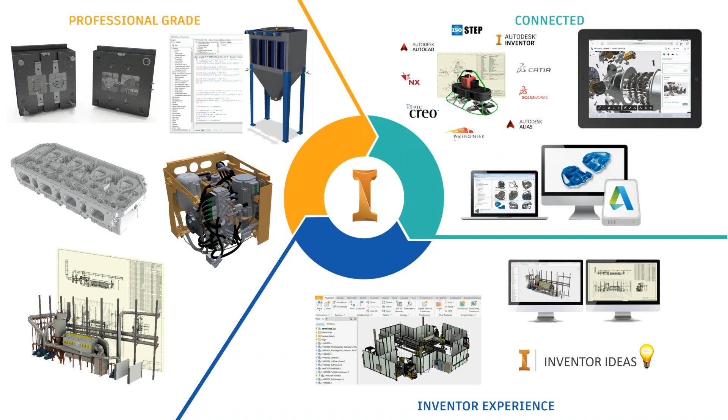And also we're creating a cohesive experience across our product portfolio, because one of the things that we realize is that many of you on the call use multiple Autodesk products. It's not just Inventor. And we don't want you to feel like you're constantly switching gears when you switch between applications that you use on a regular basis.

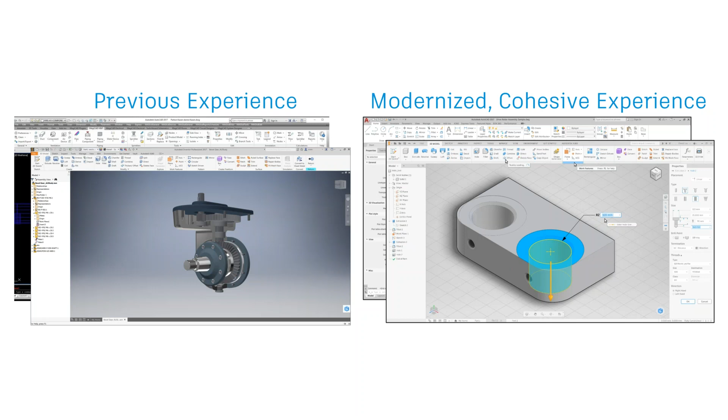And another thing that you're going to notice is the new light theme interface. We've adjusted lighting styles. We've brightened them up. There's new icons and colors and feature manipulators. And we've also been working on the property panel, which I'll talk more about in the next slide.

So this is something that you could manually do in the past, but what we're trying to do is make it easier for you, so you don't need to think about or research the settings that you have to change for high performance or high quality graphics.

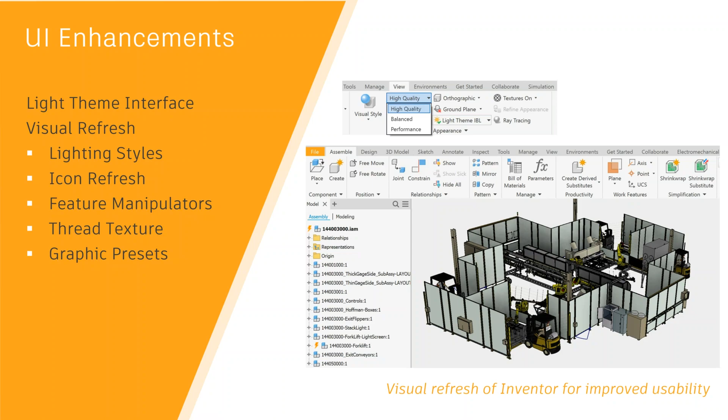So let's take a closer look at the user interface. Like I said earlier, we want cohesion across the other Autodesk products. The property panel, if you recall, we started the property panel a couple of years ago with the measure command. And then last year, we updated the whole dialog to the property panel. And it has been successful, so we added several new commands this year.

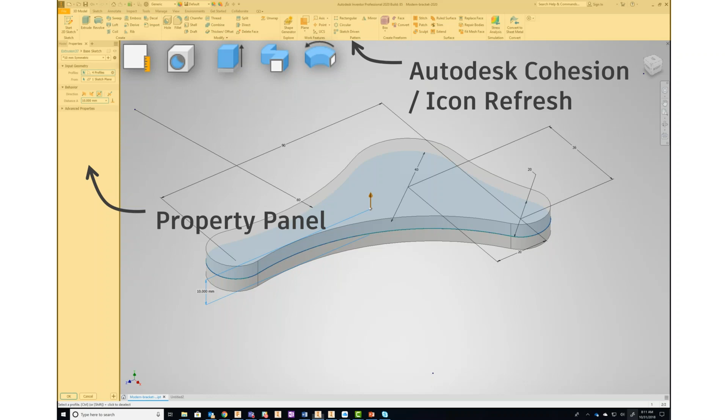And I'm going to talk more about the panel, but before I do, it's important to understand that the panel is not just a new look. The purpose of the panel is to make you more productive. And of course, you're probably wondering, well, how is that? Well, first, you may have noticed the breadcrumbs at the top of the panel.

What that does is it enables you to quickly switch between editing your sketch, your 2D profile, and the feature options. For example, if you create a sketch and then you go to the extrude command, you're able to edit the sketch without leaving the extrude. You can simply make your change to the 2D and flip right back to the extrude options in the panel.

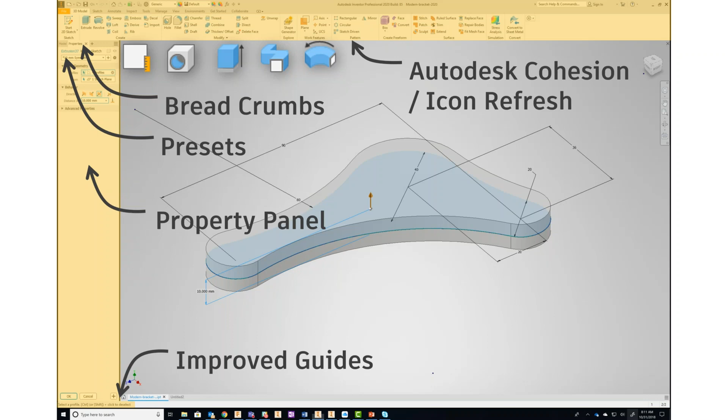And so the next thing is presets. We added these for the hole command. Now you'll find them in the extrude as well. And these presets can be set for individuals or across your design team. And then we also improved the guides. They've been there in the past, but some of them were a bit unclear, so we updated those.

And then edit in place, kind of like the breadcrumb, you have the ability to make changes to the dimensions for the sketch or the feature. You don't have to get out of the feature command to make changes to the dimensions on the sketch. And then another highly requested feature, better multi-monitor support. We know that many of you are using more than one monitor, so we made this experience better.

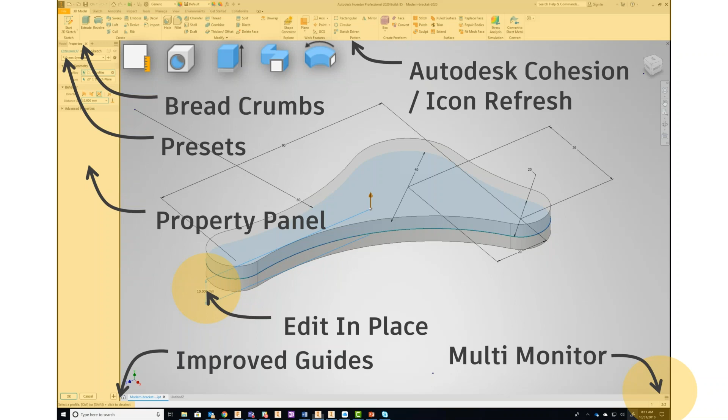So once again, on the property panel, these are the features that we have moved to the property panel for Inventor 2020. That's the extrude, revolve, sweep, frame generator, and thread. And we're trying to tackle the commands that are used the most. And then for those of you who enjoy beta testing new releases, let us know your thoughts. As you use these new panels, we spend a lot of time listening to those who are using the software as you test, for example, the new hole panel from last year.

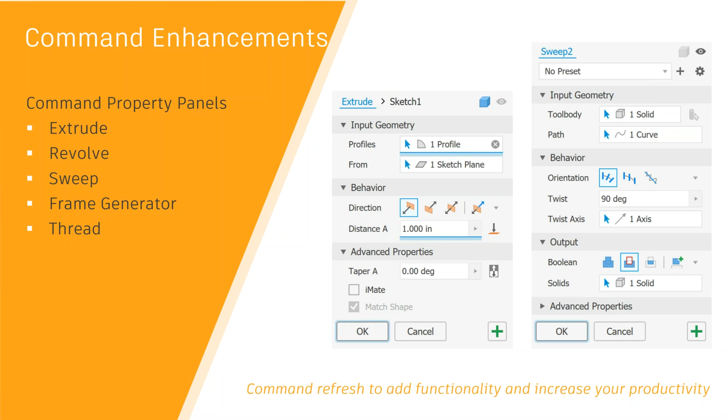So multi-monitor support. The Inventor team recognizes that many of you, I believe more than 60% of you, are working from 2 monitors. And so there's times where you prefer to use both of them for your design work. And now you have the ability to drag your models outside the Inventor application interface to other monitors. We've had great feedback on this. It was a huge request, and our customers are pleased to see their support on this one.

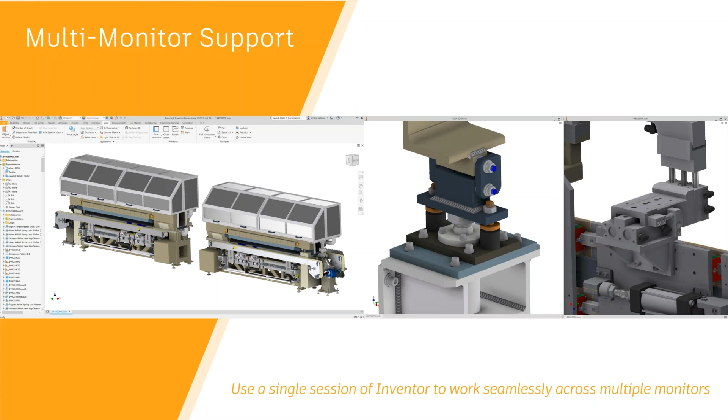So we're going to take a look at most of the enhancements in action during this presentation. And once again, you're going to notice the fresh new look for the user interface, for the ribbon feature icons, and also the features in the browser. And we're using the new lighting style here called Light Theme, which complements the new icons in 2020. And there's also the new graphic presets for quickly switching from performance-based and high-quality graphic settings. And then here, watch how easy it is to move the designs outside the Inventor application to other monitors.

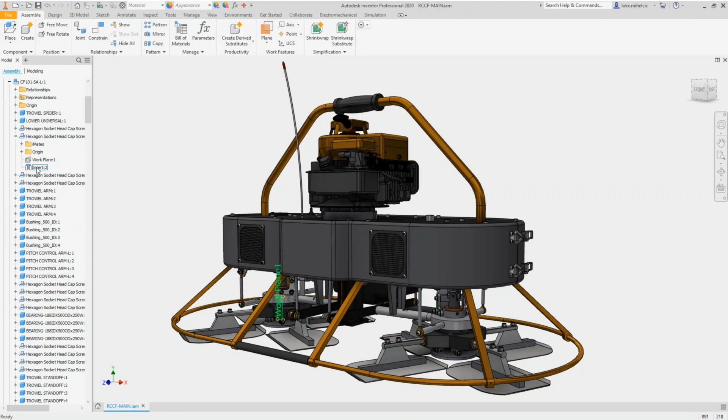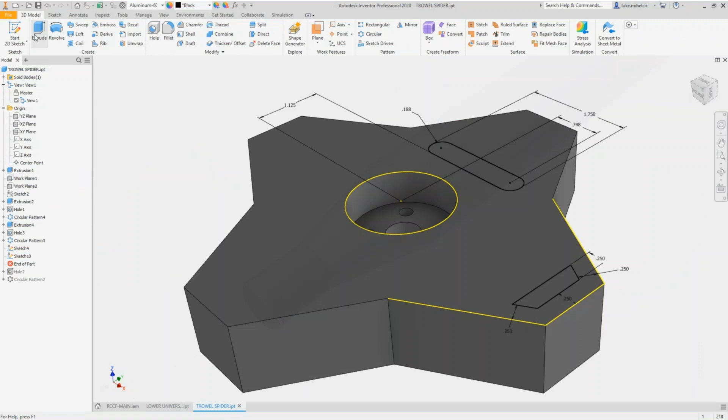And here's a look at the new property panel in action, where you can edit the dimensions in place. All the commands that you need are available in the panel for changing the geometry type, or your end conditions, the direction or taper angles. And once again, we hope that you're going to enjoy the flexibility to quickly switch between editing your sketch and the feature options using the breadcrumbs in the panel.

Okay, so now Luke is going to take you through some of the new design enhancements for Inventor 2020. All righty, thank you, Jim.

One of the first things I want to talk about is the solid sweep. This is a command you can use to either add material or subtract material. This was something you could kind of do in previous releases, but it didn't have the robustness that the current release does, so there's lots of things you'll see in the video we're going to play in a second. The idea is it's another way to create complex geometry that can actually simulate a tool path for a machine tool, if you want to simulate what removing that material would look like.

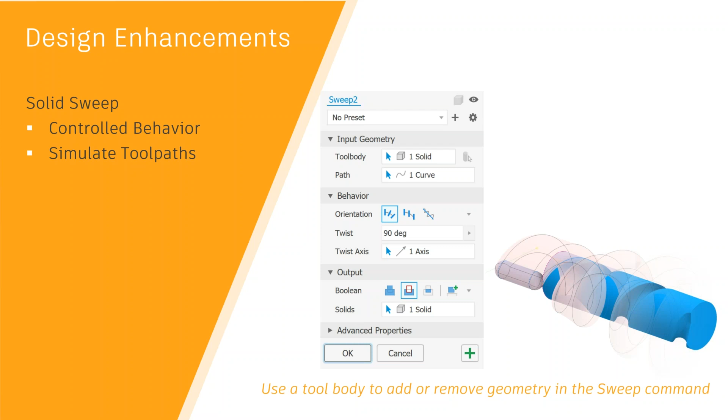The next one is the unwrap. This one was a pretty big one. We've been doing sheet metal for years and we're really good at it, but one thing people have asked for is what about stamped components? If you imagine something that doesn't follow a typical sheet metal bend calculation, where you're actually deforming the material, we can now do that with our unwrap command. It gives you an idea of high and low stresses occurring on that material as it's being deformed through that punching or stamping process. The cool thing is you can export this as a flat pattern with the material needed to create that stamp.

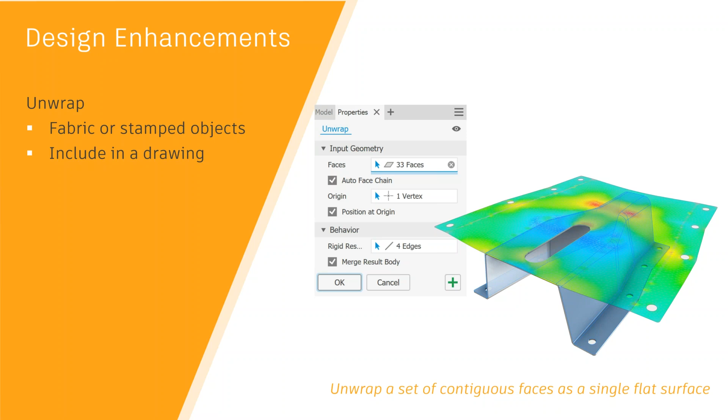Moving on to the next one, finding loops and regions. Previously, anytime you had intersecting loops and regions, it was really difficult to choose what you wanted. With some pretty easy enhancements in the background, they were able to make it way more robust. There are also some taper options, what happens to that geometry when you taper it, so now you can merge those faces when extruding with different taper options on.

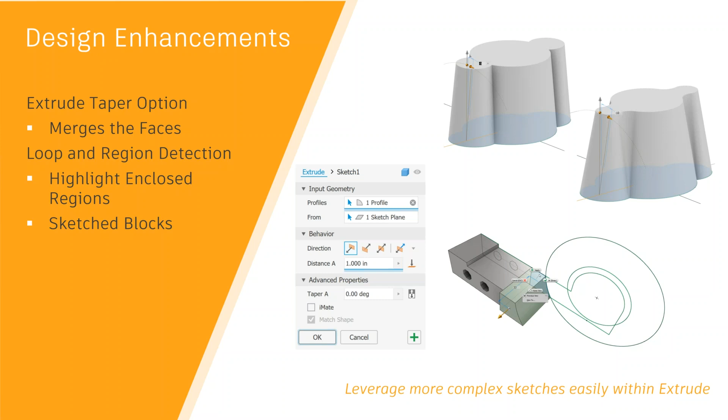The next one I want to talk about is some design enhancements as it relates to sketch blocks. Sketch blocks now allow you to actually see relationships from one to another, where previously this wasn't available. You could see information as a sketch related to a feature, but not necessarily a sketch block. That's going to be available in your relationships tool.

Content Center has some really great improvements that allow you to do keyword searching, and there's a new quick wildcard character. Let's say you forget the name of something but you know a portion of it - you can key in a portion of it, throw in a wildcard, and get that broader search to find those components when you don't necessarily know the full name of that particular part inside the Content Center.

And like always, we want our customers to move from one release to the next. We're putting in all this great technology, and there's been some really good migration enhancements. They're going to carry over property panel and command presets automatically when you migrate from a previous version of Inventor to the most current. Now we're going to take a peek at what this looks like in action.

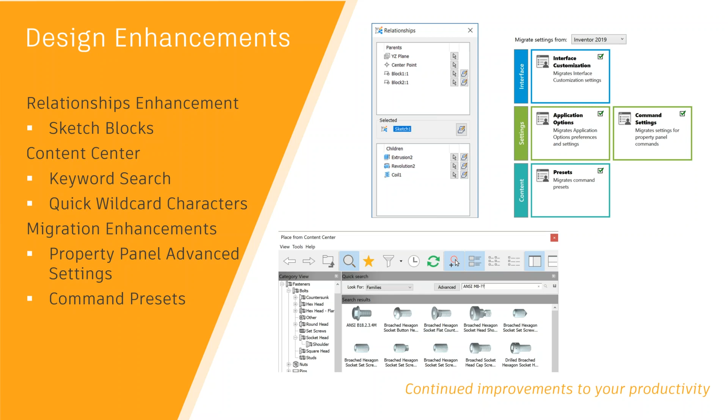There may be a bit of a delay between what I'm saying and what you're seeing, so I apologize for that. But if you take a look at the video, one of the very first things we want to talk about is seeing that region and loop detection in action.

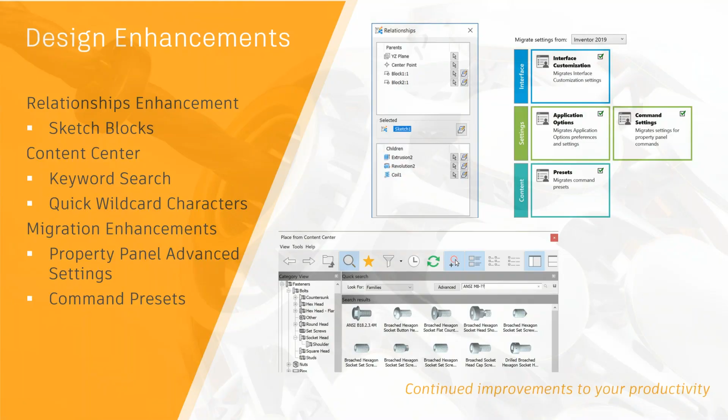Actually, we have a really cool animation of that pill moving using the solid sweep. But the first one we want to talk about in detail is the loop. You can see you have multiple loops, and in some cases these loops are overlapping, and you can really easily select one or another, so creating geometry is going to go super fast. You can see the information for the relationships as well.

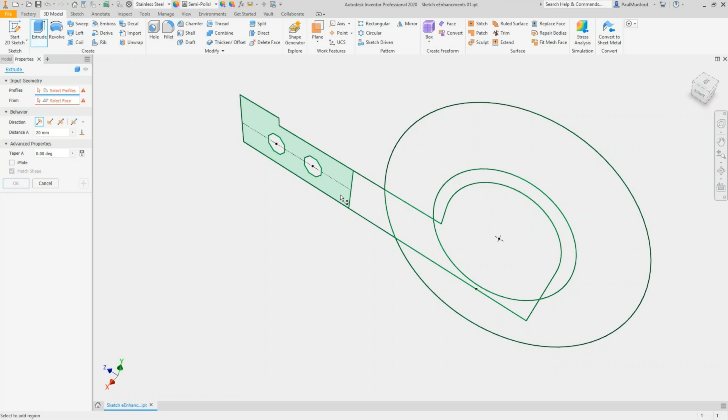And then here's that solid sweep happening in action, and it's super simple. You basically have a tool body and a path, and then what you're taking material away from. You can see that you can really easily create complex geometry. You have all types of options to show off inside that particular command, with that sweep, to create again that more robust type of geometry.

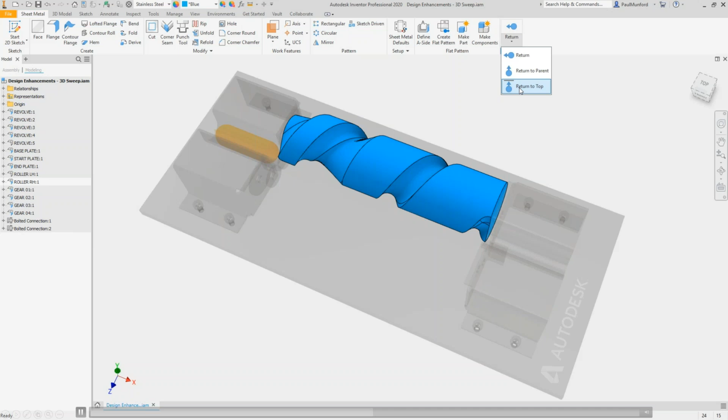I think that's the end of that video, Jim. Otherwise it may have froze up on my screen. Oh, I'm sorry about that. Hang on just a second, Luke. Okay, I'm seeing the sheet metal now. I think we're just having a little bit of a speed issue with it. Let me change something real quick. I'll just leave it. Okay, no problem. Sorry about that. Don't worry about it.

So let's move on to that next section. We kind of covered it anyways. So the next section I want to talk about is Frame Generator.

Frame Generator is a great tool inside Inventor 2020. If you're not using it, you should really check it out. It's a really quick, easy way to create frame style components from standard cross sections, and we have tons and tons of standards that we follow.

And what we've done in 2020 is added some new end cap customization. This was something you would have to do manually previously. We've also improved the notch command so that you can easily work with the property panel and create custom style notches.

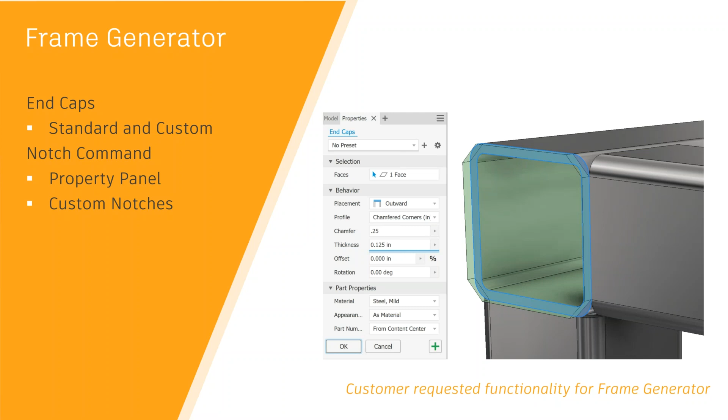Continuing on with a little more frame generator stuff, we've also done a lot with the Miter property panel, and basically this is a usability enhancement here. Previously you could miter individual portions of a frame. What the MultiMiter now allows you to do is you can do these in succession or all at one time. So way more robust.

It's going to speed up doing different trims and different extends, and you also can now easily remove the end treatment. So let's say you miter something and then you want to bring that back to its original state. There's an easy way to remove some of those end treatments.

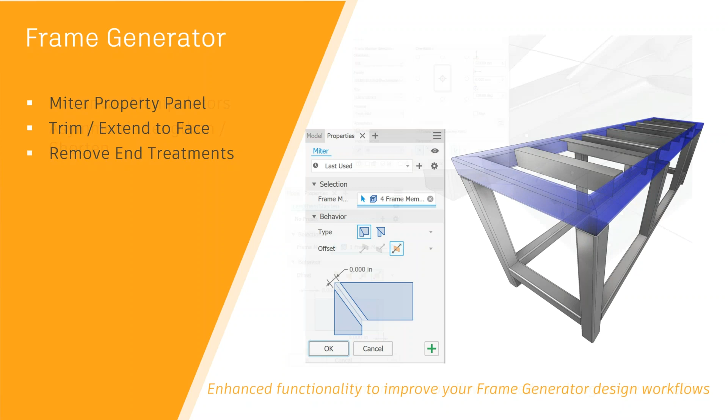And then wrapping up the frame generator section is we have this brand new in-canvas manipulator, and it doesn't really show all that well in this picture, but when you're working with a frame member, you can imagine getting it in the right orientation exactly how you want it can be challenging. Previously there was a dialog box and you had to pick which corner you wanted.

Now that in-canvas manipulator is right on the edge that you're working with. It makes it super easy for getting the exact orientation that you want for your particular frame member. And we also now have some asymmetrical lengthen and shorten, so you can add different lengths to either end of that particular frame member. It doesn't have to be the exact same.

And let's check out the video. Hopefully it'll play a little bit better this time.

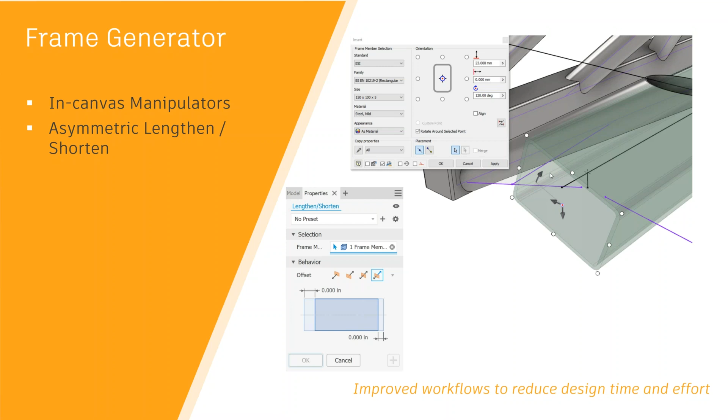One of the first things we want to do is take a look at some of that frame manipulator happening in place. The MultiMiter is the next thing that we're going to take a look at, where it can actually miter different components. And once that MultiMiter happens, you're going to see that asymmetrical lengthening and shortening.

And then the last thing is, again, that manipulator in action, placing that control on the edge that you're actually working with. There's also some file naming defaults that are in here that are going to make it super easy to have custom file names when you're creating your frame members, which is a huge benefit. That way you can control the names of your files and don't have to have these random file names generated down the road.

And I think that's about it, Jim.

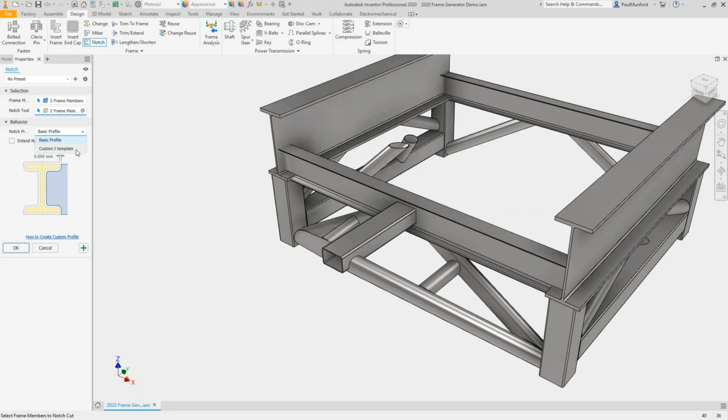Alrighty, customer-driven improvements. This is a big one. This is probably the thing that I'm most passionate about and most excited about. These are things that you, our customers and individuals involved in our beta program and involved in the Inventor ideas, this is information we get from you. This is feedback that you say, you know, we want this to work this way. Could you change this particular feature or add this kind of functionality? And this is, again, probably the most exciting stuff that I think is happening, because we're answering the questions that you're having.

So the first one is sheet metal mirroring. So right now, when you mirror sheet metals, or previously rather, in 2019 and previous, they wouldn't be associated. So if you updated one, the mirror wouldn't update.

Now the style from one to the other, so the new mirrored component is going to follow what that parent is set to. So you don't have to worry about updating them individually.

Also, joints now have a center slot option. This doesn't seem like a big deal, but if you've done a lot of assemblies, putting nuts, bolts, and washers together, the minute you have a slot and want to find the center of it, you used to have to find a way to do this. It typically took multiple steps, where now we can do this with a single joint command.

Similar to the naming you saw with the frame generator, we now can set default file name options for pipe and tube. Also, the new design accelerator with shaft generator has been improved as well. So let's take a quick look at that video.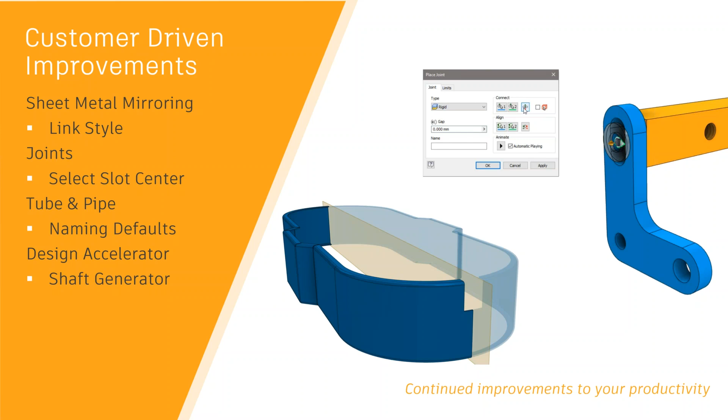So again, this all came from Inventor Ideas. There was a mirroring sheet metal part idea that one of our customers felt would be important, so we implemented it. Now when you mirror a component at the assembly level that is sheet metal, when you update that original style, that new piece of sheet metal updates. You don't have to go in and make a secondary edit.

Here is that joints feature working in action. You can see you can quickly, with a single joint, snap right to the centers of slots. So it's going to speed up that assembly process.

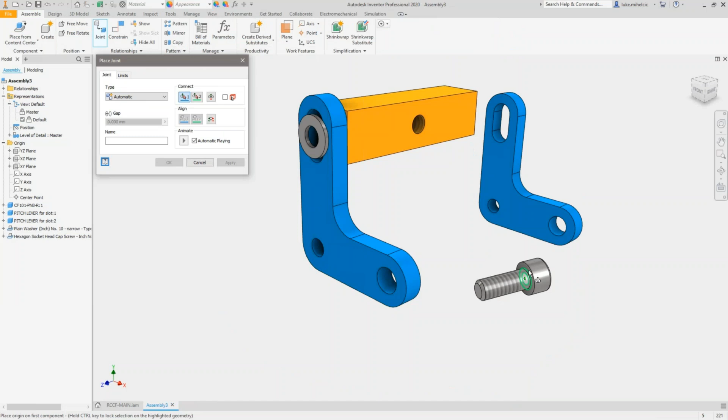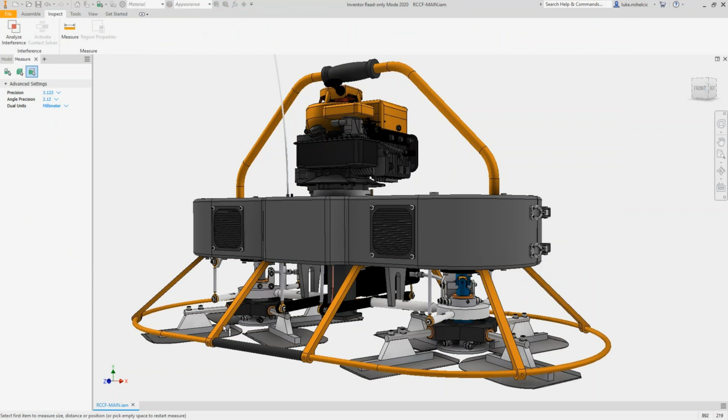The next thing we're going to talk about is taking that bill of material information and saving that. Oh, I'm sorry, this is the read-only mode - I forgot to mention that since we didn't have it on the slide. The read-only mode is another great option. In 2020, let's say you have someone in purchasing that needs bill of material information. You can easily send that information to them, or they can gain it themselves using read-only mode, and it's not going to take up a license inside of Autodesk Inventor. It is limited - they can't do anything but export bill of materials and do some measuring and slicing, but it's a really great option for sales engineers or folks in purchasing.

And give it back to Jim, and he's going to talk about some performance.

Make sure I'm off mute here. Luke, can you hear me?

You're good. Okay. So for performance improvements, this is something we've been spending a lot of time on in every release, especially over the past few years, and this release is no exception. We've made improvements to things like entering in-place editing, window selection when using selection filters for component, part, or body, and also zoom, pan, and rotate performance, especially when multiple components are selected. Component patterns have also been improved for preview display, computation, and patterning virtual components. Also, more commands are available when working in Express mode, and 3D section view performance has also been improved. It's also worth noting there are performance improvements for tube and pipe as well.

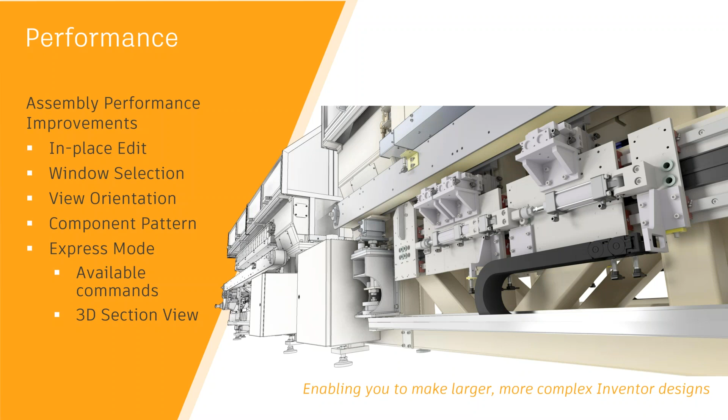For the part environment, you'll see better performance for nested feature patterns and identical feature patterns. Also, part files that contain imported DXF or DWG files are going to open faster. In drawings, you'll see improvements with view previews, changing the display of a part in an assembly using the browser, and faster auxiliary view creation, especially in large assemblies, and also faster section views. With AnyCAD, there's better performance when referencing an open CAD file, or when opening a CAD file from another system.

Hang on just a second.

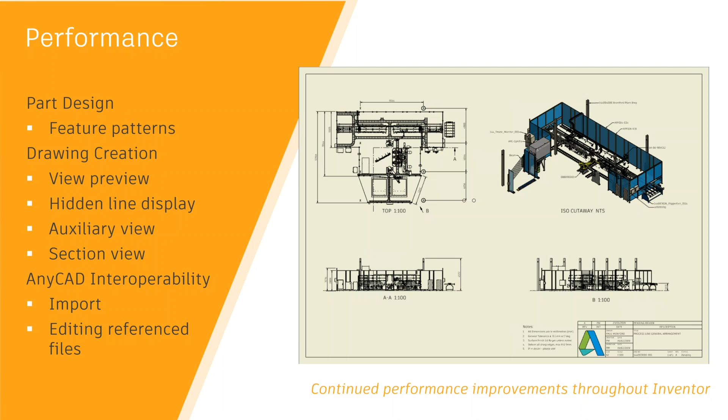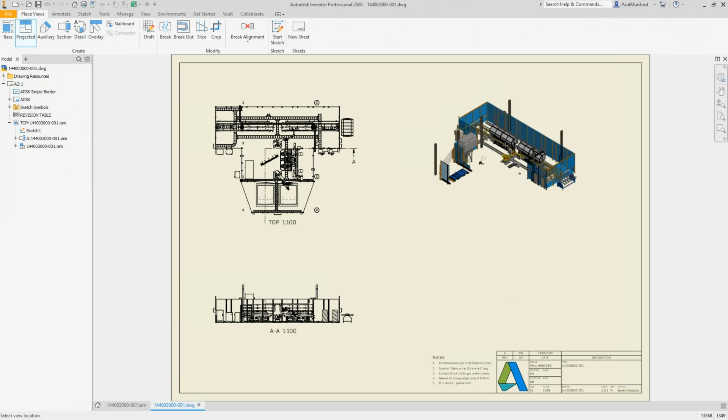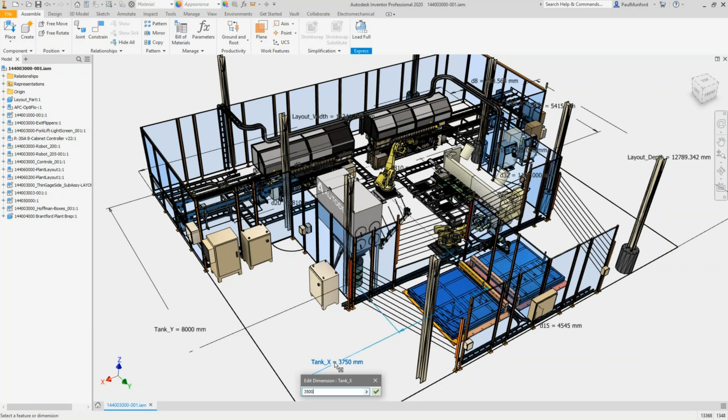So here's a look at what we've done with performance. No matter what size assemblies you work with, it's exciting to see performance improvements in all areas for parts, assemblies, and drawings. It's not just about working with large assembly models - high performance is essential in drawings as well. Working with AnyCAD references, in this case STEP, you'll see improvements when referencing files from other CAD systems. And for those of you who enjoy working in Express mode, you can now leverage more workflows like skeletal modeling techniques. The use of the browser is now much more responsive, and zoom and pan has also been improved when you have a lot of components selected.

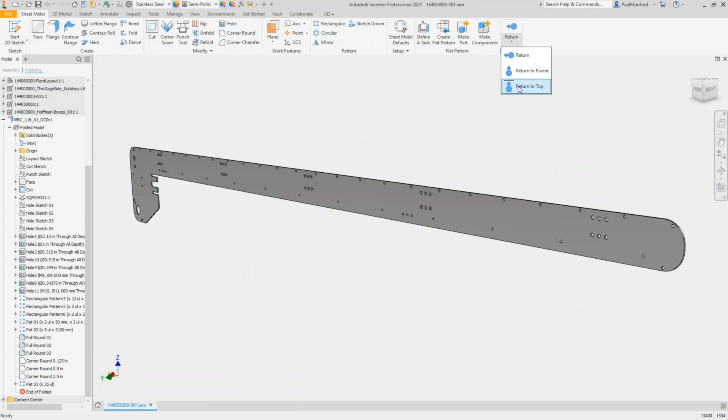We'll jump into the part environment here. In the part environment, you'll see performance improvements for feature patterns. This also means that associative patterns in your assemblies are going to generate quicker too. And then here in the drawing environment, we can create auxiliary and section views faster.

Now for interoperability, one of the things that many of you on the call are familiar with is AnyCAD. It's the ability to open a file from another major CAD system in their native file format without the need to translate the geometry, and it remains associative. So if the model changes, it's going to update in Inventor as well. As expected, this technology requires a lot of dedication to stay up to date with the versions of those other CAD systems. And we've done that for CATIA, JT, Parasolid, Rhino, and SolidWorks.

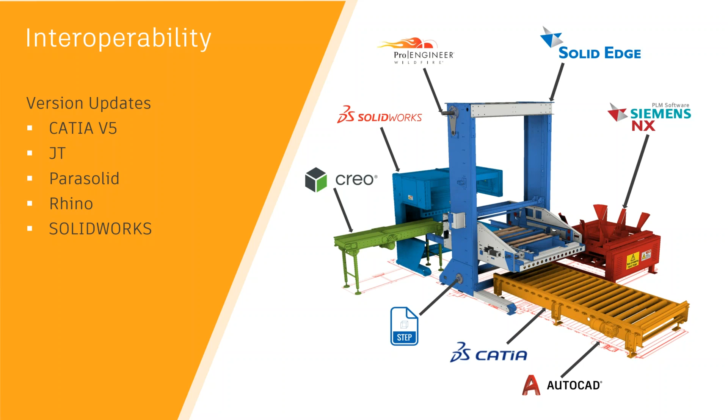So sticking with the interoperability theme, some of you are working back and forth between Inventor and Fusion 360 to do things like generative design, which is great. We want to make sure that there's a good workflow between them so you don't have to translate the data. This is something that we made available last year, and we're fully releasing the technology in Inventor 2020.

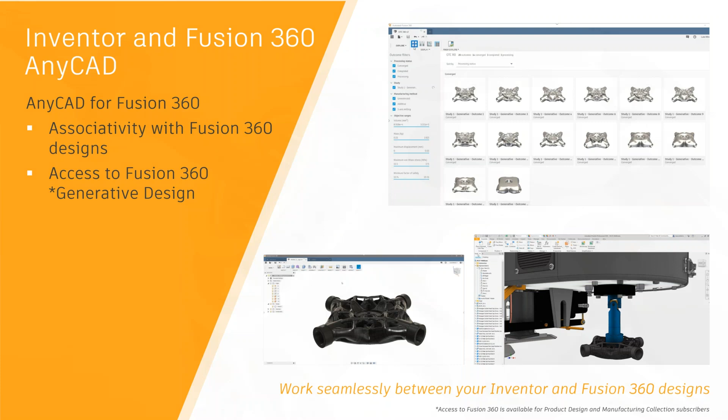So once again, there's a couple of things improved with AnyCAD. First, you're going to notice better performance when referencing files from those other CAD systems. And we're continuing to update Inventor to work with those latest versions that I had mentioned. AnyCAD is really just one of the greatest enhancements for Inventor, and we're going to continue to focus on it for future releases.

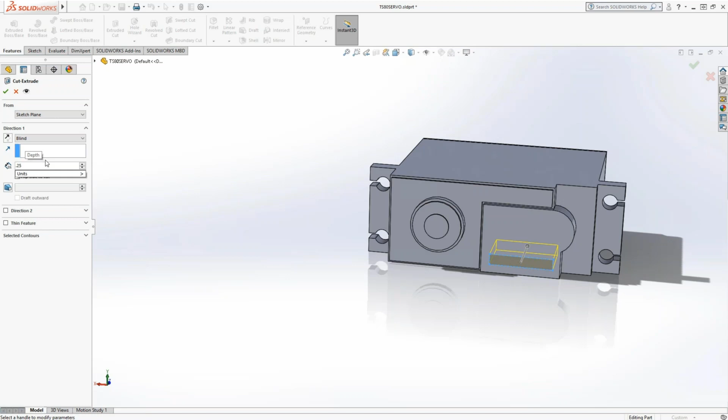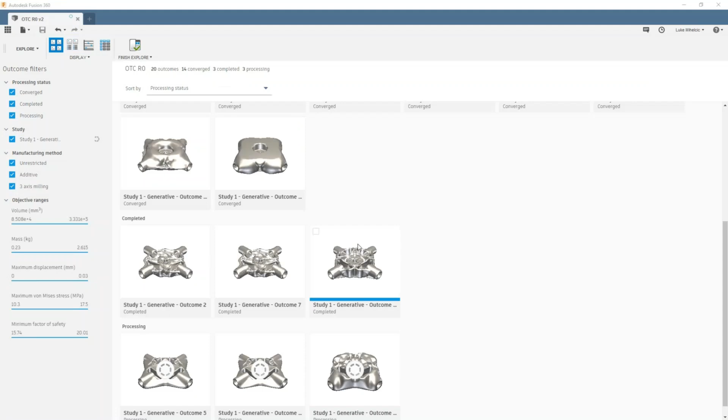And additionally, the latest update makes it easier than ever to connect with Fusion 360 for generative design workflows to Inventor. Now you can simply reference the Fusion 360 file, eliminating the need to export and import the data. You can now access generative design as part of your subscription to the Product Design and Manufacturing collection. So for those of you who are new to generative design, you can set up studies to find the best possible solution based on your own design requirements.

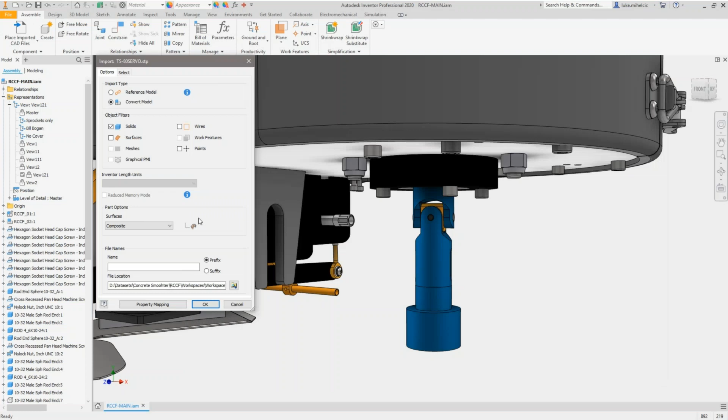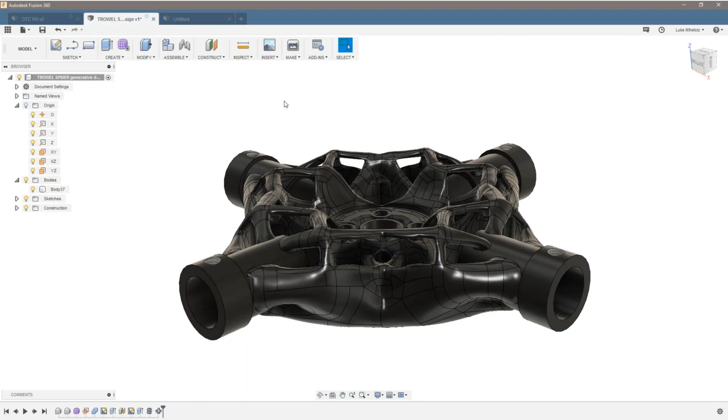And any other changes that you make in Fusion 360 are going to reflect inside Inventor. This AnyCAD technology, like I said, it's a game changer for a lot of you on this call who are working with customers or suppliers that are using various CAD software, because it enables you to work with anyone, regardless of the CAD software that they use. So now Luke is going to talk about the latest point release of Inventor, which is hot off the press this week.

I think you're muted, Luke. I'm sorry, am I muted? Sorry, I was muted that whole time. It was a really good answer. I was going to say, I'm just going to answer a question, Jim, while we're going.

So Pedro asked the question, how many parts can you put into your assembly? That's really going to depend on your system requirements and the PC that you happen to be running off of. We have a customer right now who has over 1 million parts in an assembly. They are running really big, really expensive computers, I imagine. So that is like on the absolute kind of high end.

Based on your system and your PC requirements, you should have no problem running multi-hundred, multi-thousand part assemblies when you're working inside of Inventor. So hope that answers your question. It kind of is really dependent on the system that you're running it off of. Obviously, a laptop is not going to do as well as a super powerful desktop that's kind of dedicated for CAD.

So, but as Jim mentioned, hot off the presses, so the 16th, so yesterday, Inventor 2020.1. We do a handful of dot releases each year. This is the first one. And this one is chock full of really great stuff as well.

You're also going to be able to change the annotation plane of your components. You're going to be able to go in when you've done 3D annotation. I typically had to delete it to redo that. Now you can actually change it after the fact. And one thing that's really powerful, and you see in that image on the bottom right, is all that kind of extra information there. So it says fillet bend radius 0.625, another bend radius 0.625.

That's what we call extended part information. And it wasn't available everywhere, but now it's available in sheet metal, shells, splits, combines, patterns, surface features. So without having to dig into a component, you can get an idea of what that part was made up of and what some of the dimensions are. So it can eliminate some measuring and some guesswork and having to dig into different parts and assemblies.

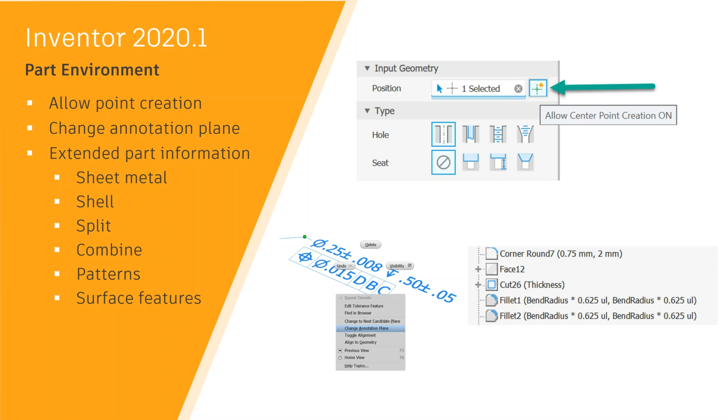Next slide, we're going to talk about the assembly environment, because we tend to make updates in multiple locations. So the design accelerator has been restructured for a handful of tools, and what this means is when you used design accelerators previously, it made a subassembly of those components that are included in that design accelerator. Now you can choose to have that subassembly on, or you can choose to have that subassembly off. It's totally up to you. So it gives you a lot more control. A lot of this stuff here is about controlling your assemblies a little better.

Frame Generator has better controls on it. So the actual manipulator that we just talked about in 2020, it would show up at the end of a frame member. Now that controller shows up where you pick on that particular edge, and again, it's just a little more user-friendly.

Probably my favorite thing that happened in 2020 and 2020.1 is the ability to create virtual components. If you've ever had to create virtual components inside of Inventor, it was a pretty tedious process if you had more than one. Now you can very easily, via your bill of material or BOM manager, create multiple virtual components. And these are things that maybe you don't do a 3D model of, but you want to be included in your bill of material. So maybe things like paint, a maintenance kit, or a specialized wrench that goes along with that particular assembly for assembly and disassembly. Now you can do all of that quickly and easily inside of the BOM manager.

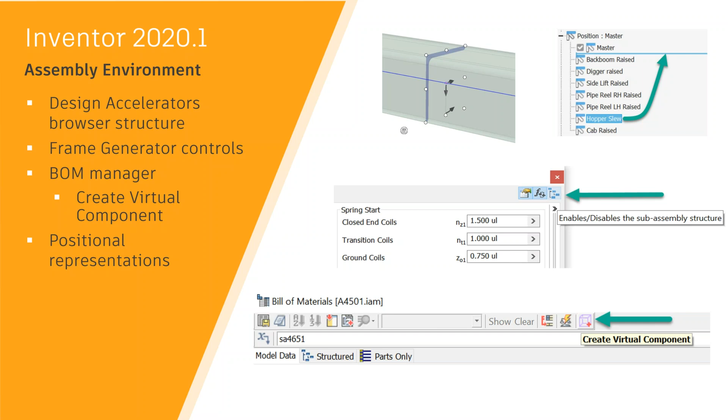And positional representations can now be just dragged to different locations. You don't have to worry about deleting them and recreating them, so you can reorganize those all you want.

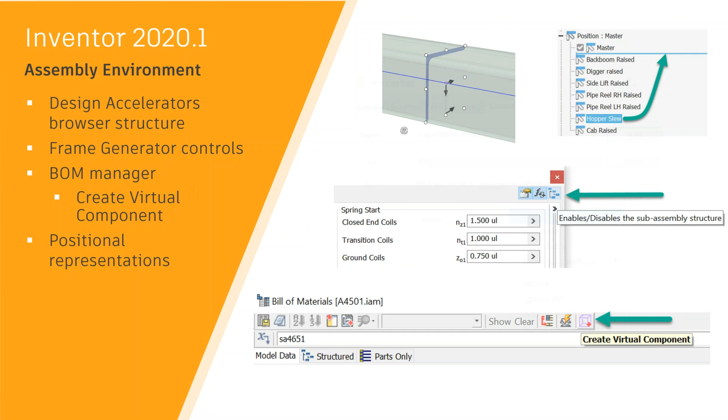And then finally, inside of the drawing environment, the iProperty dialog box has a ton of stuff added to it. So right off the bat, I'm a terrible speller. One of my favorite things is the fact that spell check is now included with all of your custom iProperty pieces of information that you're adding. Column width is now going to adjust automatically, so they won't be truncated whenever you go back and look at them. And previously, you had to delete these things one at a time. They've added the ability to delete multiple ones, or all of them, all at one time.

So now we're going to check out the video, and hopefully this one plays. I think some of the other ones are playing slowly, and my voiceover wasn't right on top of it. But this is a new video, so I have a pretty good handle of what it should be.

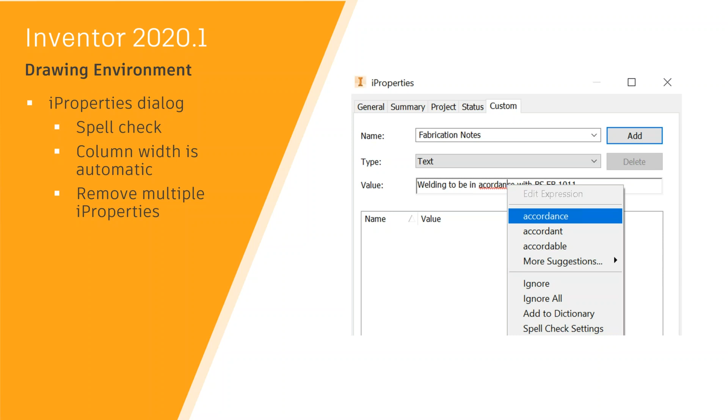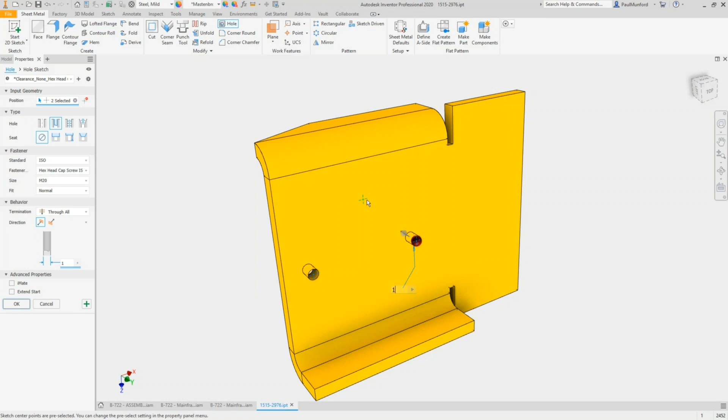So the first thing that you're going to see inside of Inventor is this hole command working with this option, how it's going to choose and set up those center points. So it's super easy to turn this on and off. It's a toggle, and that basically is going to control how you're creating those holes. And it's going to speed up that process and make this a little more user-friendly.

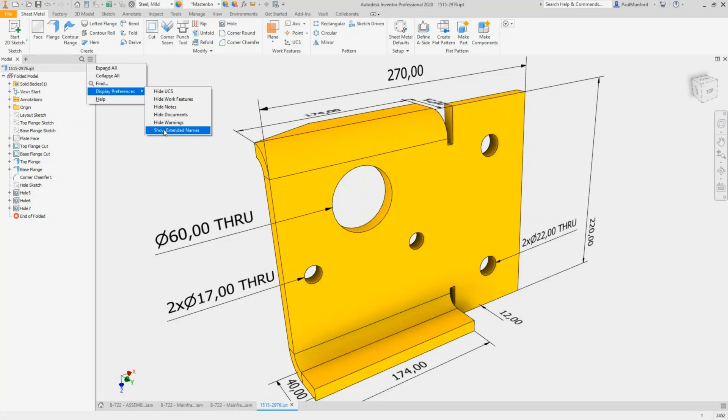Next up is the design accelerators. This is a really important one because typically you are always going to have things happening with your assembly when using design accelerator components where maybe it didn't behave the way you thought it would. The parts would turn into a subassembly, and there'd be a separate folder created where you're storing your files. And now you can actually go into those design accelerators and turn this on or off. So rather than having a big, huge assembly inside of your Inventor environment, you can now disable that, and it'll place everything at that level. So again, it gives you options for how you're going to control your assembly structure.

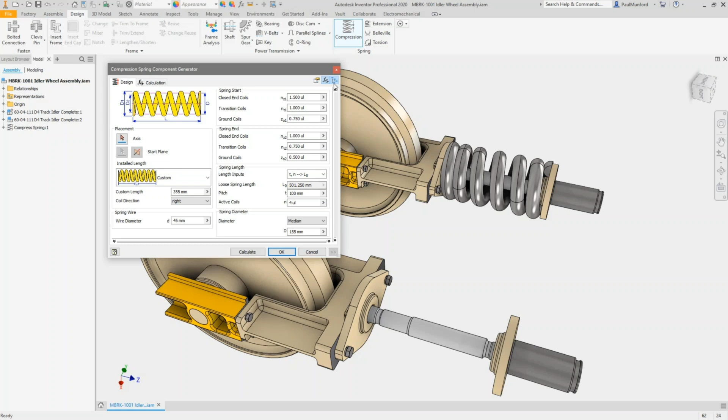And you're really going to notice this. We're going to create these two different ways, one with it enabled, one with it disabled. And you really see the difference in your browser. In one of these, it's a super simple insert into this assembly. And in the other one, it shows up as a really big subassembly with all these different things that make it up. So lots of options there.

Also, the manipulator being where you select it on the screen, again, a big usability piece, makes it really easy when you're working with that frame generator tool. And then the next one is going to be the virtual components.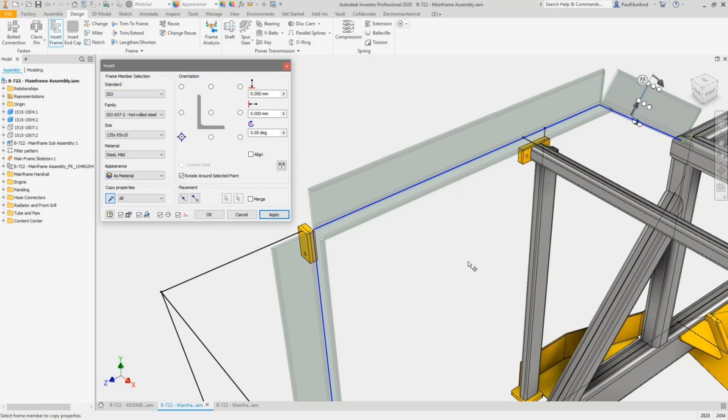So this is really powerful. Again, probably my favorite thing. So literally, you don't have to go in and create new part virtual and do that over and over again. So right at your bill of material level, you can create as many as you like, one after the other, and fill in some of the iProperty information. So it's really going to speed up that process.

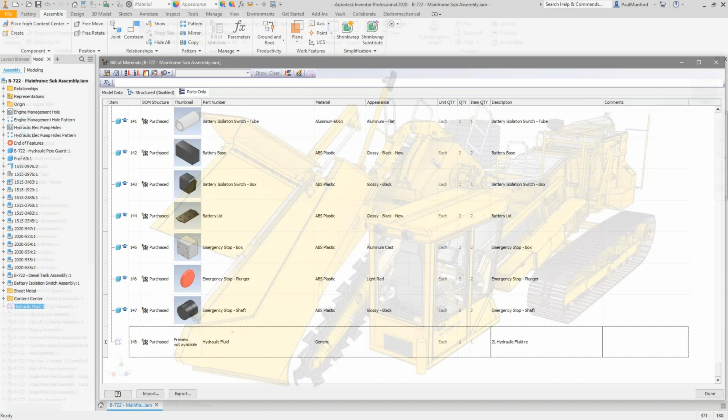Here, you're going to see how easy it is to drag and drop your positional representations to a new location. And then finally, we're going to check out all of those different iProperty updates. So you're going to see when the spell check is happening, it's going to give you the little red squiggly line letting you know that it was misspelled. You're going to be able to go in here and add those components and see that spell checking happening dynamically as you're working on them.

And also, again, that ability to delete multiple custom iProperties at one time rather than one after another. So it should, again, speed up a lot of things. And again, here's a look at the Inventor ideas. So if you haven't engaged with that, I would highly recommend it.

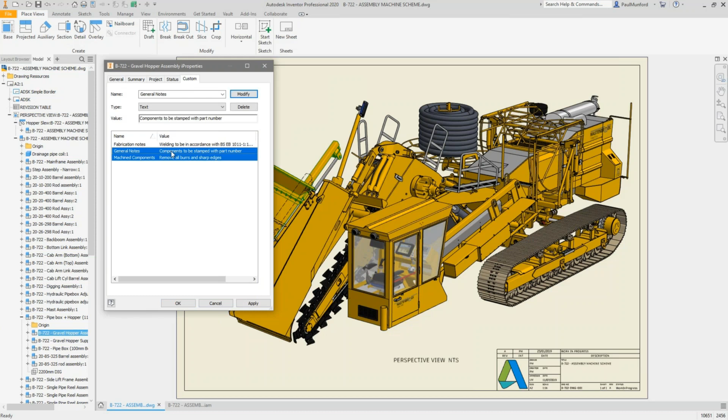We made these name changes to help better understand the tools that you have access to that work directly inside Inventor. We actually began this effort last November when we released Inventor Tolerance Analysis. And it's also worth mentioning that some of you on the call may not have installed Inventor 2020 right away. The product names for previous releases are going to remain unchanged.